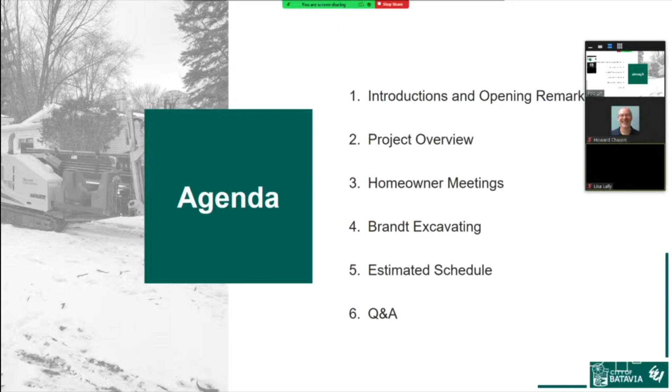Part of the agenda, talked about the introductions and opening remarks already. I will be discussing the project overview, process of homeowner meetings, introduction of Brandt Excavating, estimated schedule for the project, and then the Q&A session at the end. Starting with the project overview. So this is Batavia's first large-scale planned lead service line replacement project. That's the LSLR, lead service line replacement. You see that acronym quite frequently.

The city is utilizing funding from the IEPA with 100% principal forgiveness up to $4 million. It's a very lucrative project. It's taken a lot of planning, a lot of advanced planning. The city's been very proactive to get this project underway, to take advantage of essentially what is a grant of $4 million from the IEPA, because it's a loan, but since it's principal forgiveness, there's no money out of the pockets of the city for this project. So it's been great to get to this point, ready to get in construction now, take advantage of the funding opportunity that's in front of us.

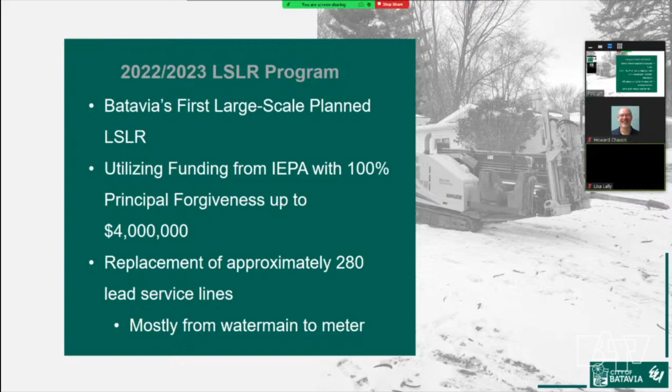So you have the water main that is out usually under the street, and then there's a service line that's tapped into the water main that goes into the home. The city-owned portion is between the water main and the service valve, or curb box, or B box as it's referred to. And then the private side is between the B box and the home. So when we talk about a full lead service line replacement, we're talking about replacing it from the water main all the way through the meter inside the home.

There are also partial replacements as part of this project, which I'll talk about in a little bit here, that can be either from the water main to the B box, or from the B box to the meter. So again, most of the service line replacements on this project are going to be full lead service line replacements. But there are occasions where the lead is only either between the water main and the B box, or between the B box and the water meter. And if that's the case, then it might be only a partial service replacement.

Also, if there's a galvanized line on the customer's private side between the B box and the meter, if that galvanized line is downstream of lead on the city-owned side, that galvanized portion is going to get replaced as well. Or if it was known to have been lead at some point in the past, the galvanized will also be replaced.

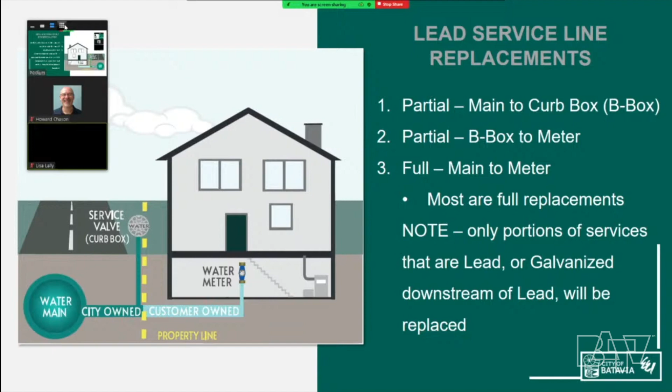So, and again, the other important takeaway here is only portions of services that are lead or galvanized downstream of lead will be replaced. There's no copper services being replaced as part of this project.

All right, excavation around the B-box and water main. Only small excavators are going to be utilized on the property. There's going to be very little excavation occurring on private property. There's going to be a drilling machine that will be used as well because directional drilling is going to be the method utilized in almost every case on this project. So the drilling machine will be able to stay off the private property by and large, and to keep the excavation to a minimum on the properties.

Most lead piping will be abandoned in place, but completely disconnected from the water main and the interior plumbing and replaced with copper. So we're not taking the old lead service line out. That will be in the ground still when the project is done. It will just be abandoned in place, not connected.

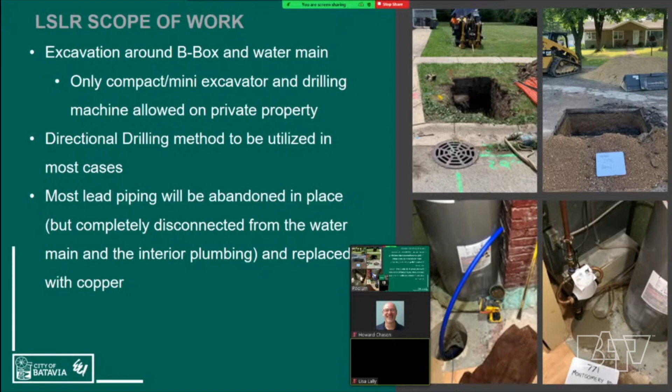A new curb stop or B-box will be provided with every service replacement, whether it be a full service or a partial replacement. The meter that you have may be reused or it may be replaced. It just depends on the circumstances and if it's due for replacement. New full flow ball valves will be added to each side of the meter. New meter couplings and meter gaskets will be installed.

And basically the service line replacement inside the home will go to the shut-off valve on the downstream side of the meter. So there'll be shut-off valves on either side of the meter. Those will all be new. And then just downstream of that second shut-off valve will be where it'll tie into the existing plumbing inside your home, and that's where the termination will occur.

The exterior is to be restored to existing condition. Sod will be used for green space restoration. Temporary seeding will occur from July 1st to August 31st because no sod will be allowed to be installed during that time, but that seeding will be replaced with sod after August 31st. The interior is to be restored to existing conditions, including drywall, painting, cosmetic repairs if needed, and the contractor is to seal the foundation penetrations and make it watertight.

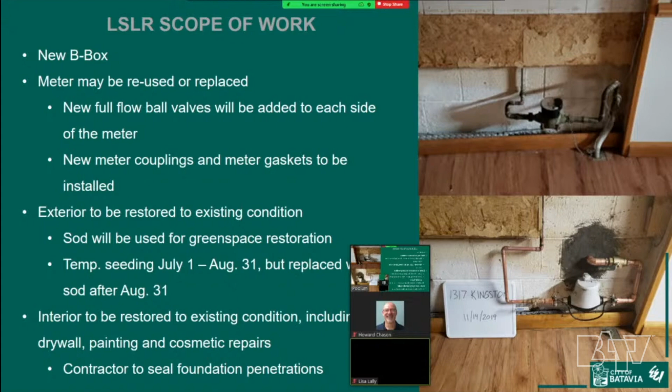All work will be warranted for 1 year. After that, all private side materials, so between the B-box and inside the home, will be the responsibility of the homeowner to maintain. There are terms and conditions that are identified in a temporary construction easement that I believe all have been executed. And then there's the contractor's certificate of insurance that will be provided to the homeowner before construction starts.

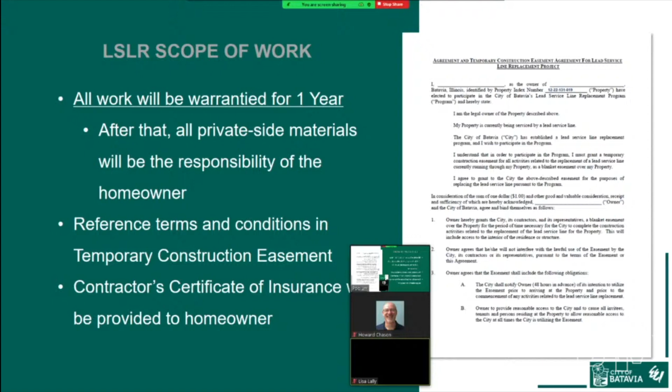They're going to target 2 to 3 service replacements per day. It's contingent on various factors, but focusing on trying to get multiple service lines done per day and anticipating final completion by February of 2024. And in fact, the anticipation is that it should be all done by the end of this construction season, maybe November or so of this year. Funding again is through the Illinois Environmental Protection Agency State Revolving Fund loan with 100% principal forgiveness up to $4 million.

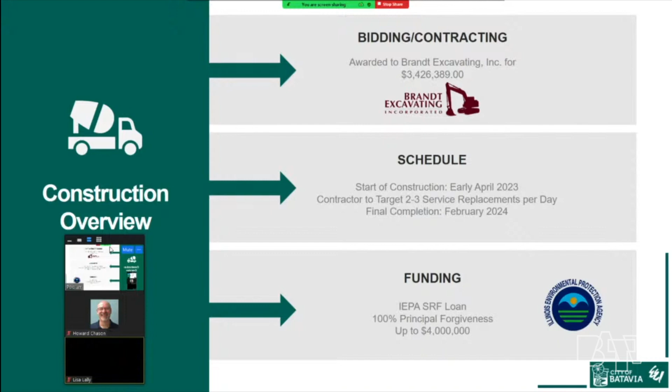There will be homeowner meetings. So the contractor resident coordination is a really big part of this process that we have identified requirements for, so individual meetings are to be coordinated with each homeowner 3 to 7 days prior to replacement of service if access to the home interior is required. So again, if it's a full service line replacement or if it's a replacement of a service between the B-box and the meter, these resident coordination meetings will occur 3 to 7 days in advance of construction.

The partial replacements from main to B-box will not require these meetings, but advance notification of work will be provided to the residents in these cases. Typically, it'll be 24 hours in advance with a door hanger giving information, just as an FYI of how long the service may be out of water and other pertinent details. Existing access to residences will be accessible at all times. If access is temporarily restricted, the contractor will notify the resident 48 hours prior to that occurring.

And then we will be handing out a document, replacement and flushing of lead service lines. That is a guideline that's provided and will be provided to you on the day that the service is replaced to give you some pointers for how to flush out your line.

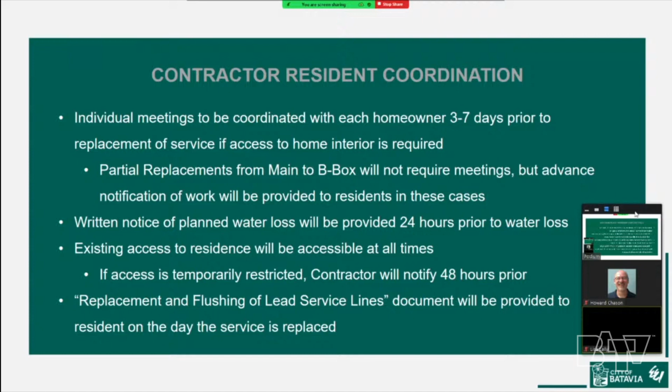Brandt Excavating, again, has been awarded the project. We'll be starting here in probably just over a month. Actually, before this, we had the pre-construction meeting to go over some details and get ramped up and ready to go. With us here today is Chris Ahern with Brandt. I'll mention some things about Brandt, and Chris, you can speak up as well if you want to say anything additional, or just let it go.

Brandt has been doing similar work in lead service line replacements for over 8 years. They specialize in horizontal directional drilling and excavating. They have successfully completed lead service line replacements for numerous communities, including the city of Joliet, the city of Aurora, which is ongoing right now, Village of Montgomery, which is a project that we worked with them on. So Engineering Enterprises has familiarity with them, and it's a very successful project, and the Village of Beecher.

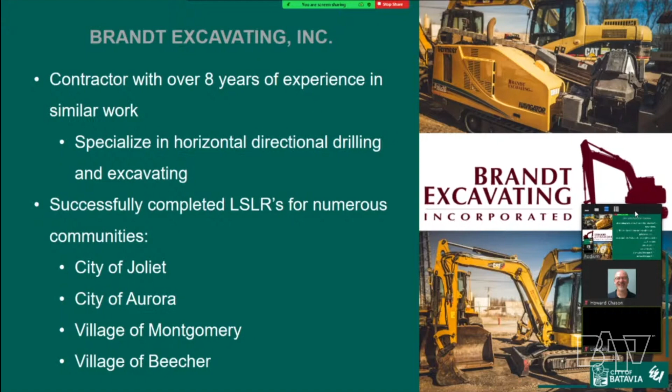We're a small company. I have around 15 to 16 employees. We're family owned. So, you know, we'd like to say we care a little bit more. Pretty much everything else he had up there sums it up. I look forward to getting started and working with all of you. And during the Q&A time, there might be something else for Chris to pipe in on as well. Thank you, Chris.

Estimated schedule. So this is just a rough idea of what to expect in the sequence of operations. Again, the resident meetings will occur 3 to 7 days before replacement of a particular service. The contractor will set up any traffic control and erosion control that might be necessary. The installation of the new water line will occur, and then the flushing of that line and getting it back into service. And then the restoration items will occur. 4 and 5 could interchange depending on circumstances. The concrete and asphalt restoration, as well as the exterior and interior restoration.

The anticipation is that restoration would be done as quickly as possible. So in some cases, it may be done the same day or a couple days later. It may be 1 or 2 weeks later, it just depends on particular circumstances. The goal is that you're not going to be inconvenienced at all. And obviously, there's going to be discussion on the restoration schedule for certain things. But they're not going to be able to patch every pavement hole that they make on the same day.

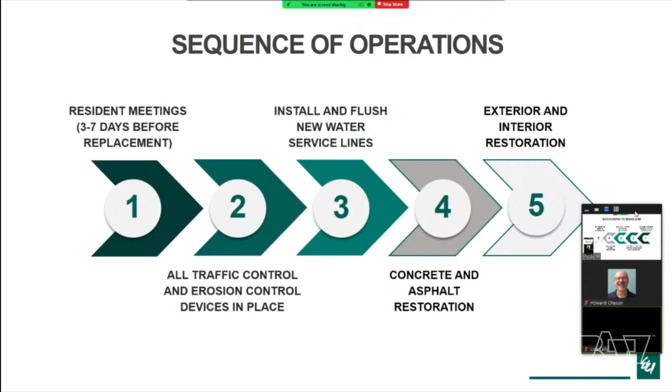Construction schedule, mentioned this already, early to mid-April, targeting 2 to 3 service replacements per day. And based on the anticipated number of replacements that we have at this project, we're anticipating final completion certainly by February of 2024, but even sooner than that, hopefully in November or so of this year.

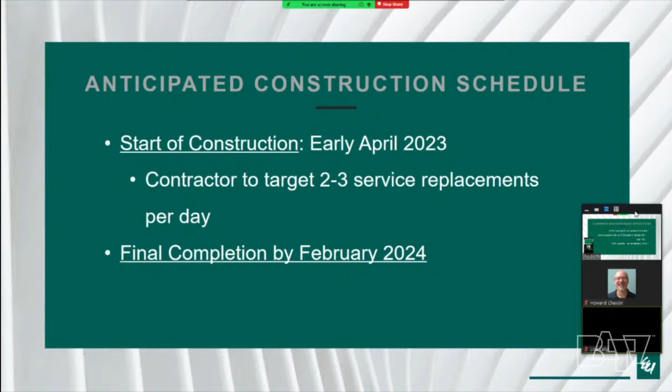All right, with that, we will go to the question and answer period. There were some questions submitted, and I think it would be appropriate, Jeremy, right, to go through these first, one by one. Okay. And then we'll also take questions from the audience and anybody online who's joined us. If you could ask questions at this time as well, get those in, and we'll start working through those. So I'll go through these one by one as they came into the city by 3 o'clock today.

First one: if there is an interest in replacing the sewer line as well, can this be done at the same time?

Can it be done by the same contractor if the homeowner pays the cost? Should we contact another contractor to do the work? And for this, we kind of default to Brandt to tell us. I understand you're not really interested in doing sewer service replacements. Correct. Okay. So I think that's the answer to that question.

Second question, what is the timeline for restorations to be completed? Homeowner has a retaining wall and landscaping that will likely be impacted. So a couple things on this. One is we're really hoping with the nature of the construction, with the drilling and being able to stay off of the private property and just on the right of way, that we're going to be able to avoid a lot of situations with landscaping and retaining walls.